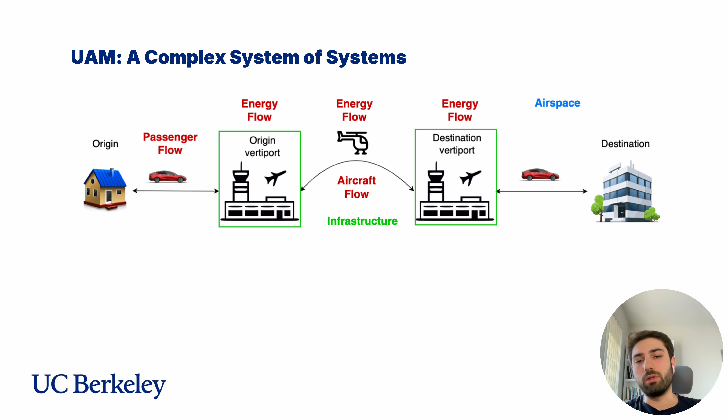Urban air mobility, aka UAM, is a complex system of systems. In this vision, passengers leave their origin and go to an origin vertiport using a vehicle or by walk. Then from origin vertiport to destination vertiport, they fly via eVTOLs. And then from destination vertiport, they use a vehicle or by walk to go to their destination.

However, in this system, we have sub-complex systems such as vertiports or aircraft fleet. Additionally, we have temporal couplings between these systems. For example, flight times in the system can be from 15 to 20 minutes. Passenger processing times or passenger waiting times can be 5 to 15 minutes, and charging times can be 10 to 15 minutes. So the bottleneck in the system can be any of these three, and this bottleneck will cascade to the other operations.

Additionally, we have resource coupling. For example, if you don't have enough infrastructure capacity, then either your aircraft will delay at the origin vertiport or they will hold in the air at the destination vertiport and they will burn energy. And this energy consumption will cascade into your operations.

For example, if you burn a lot of energy, then you need to charge more. If you charge more, then your aircraft will be unavailable for the incoming demand. So because of that, you will either lose some passengers, have to spill or reject some passengers, or your passenger waiting times will increase.

Additionally, weather will have significant impacts on these vehicles. Weather, or especially wind, will increase or decrease your energy consumption or increase or decrease your flight times.

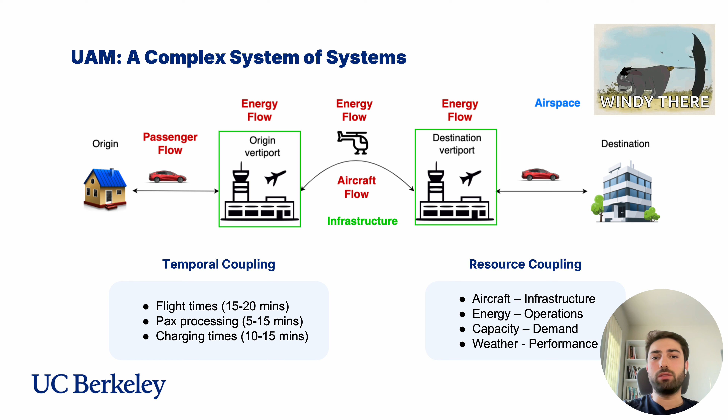Additionally, we can have uncertainty in the passenger arrival process. The demand uncertainty creates cascading effects throughout the UAM system. When demand spikes unexpectedly, we might face insufficient aircraft availability, and that will lead to longer passenger wait times or passenger spill.

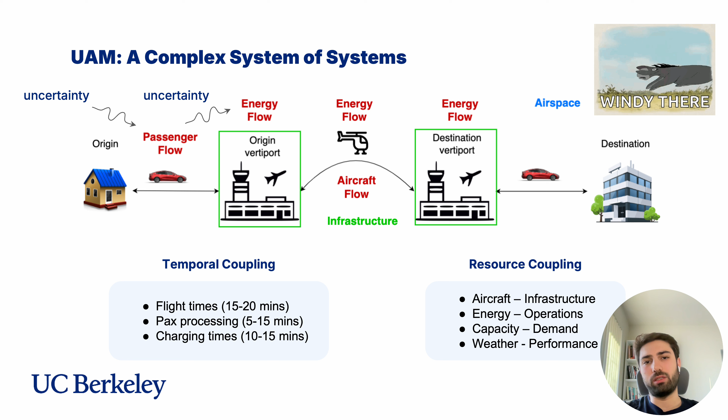We take a systems engineering approach to UAM. First of all, we will look into infrastructure. We will do vertiport design and analysis, and then move on to the modeling part. We'll introduce VertiSim, which is a UAM network simulation tool. Then we'll go into planning. We will optimize network operations while accounting for environmental impacts, particularly wind effects. Finally, we tackle the challenge of real-time fleet control through reinforcement learning approaches to fleet management.

All right, let's start with infrastructure.

All right, what is a vertiport? Vertiport is an infrastructure for eVTOLs to land, take off, taxi, charge, board, and deboard passengers. We can model vertiports using graphs. For example, TLOFs, which are touchdown and liftoff areas where aircraft take off and land, can be modeled using nodes. Parking pads can also be modeled as nodes. And taxiways can be modeled as links that connect these nodes together.

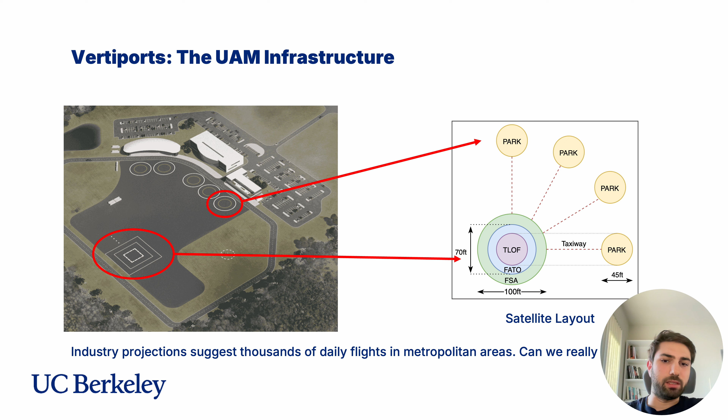All right, what is capacity and why does it matter? We define capacity as the maximum steady-state throughput of aircraft per hour, given that the maximum queuing delay for holding aircraft remains below a specified threshold with high probability. We define maximum queuing delay because we don't want aircraft to hold like 30 minutes, 45 minutes, an hour in the air because it burns a lot of energy. So we want aircraft to hold at most some specific threshold with high probability, and that's how we define the capacity.

The capacity will impact our network connectivity because if you don't have the capacity, you basically cannot fly that route. Secondly, low capacity will create some network effects that will impact your operations at other vertiports. Low capacity definitely will reduce your service quality and guarantee, and it will cost money in terms of land.

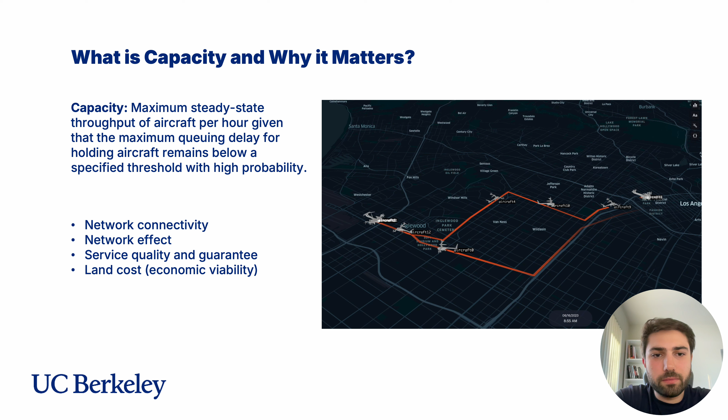Okay, vertiports are actually highly interactive stochastic systems. There is some literature on vertiports and, of course, airports. We draw some similarities from airport literature. For example, airports are modeled with stochastic queuing models.

They use single server queuing models with infinite buffer capacity. What I mean by infinite buffer capacity is that they model runways without any capacity at the sink level. For example, they assume there are infinite levels of parking pads or gates because airports are actually huge, so you can actually put aircraft somewhere at least.

There are other studies on vertiports. For example, some studies develop deterministic integer programs, and they're mainly upper bounds because there is no uncertainty in the system. And some studies did queuing models using single nodes or multi-nodes with independent queues. So in the later part of this presentation, we'll show why we should not model them as single nodes or multi-node with independent queues.

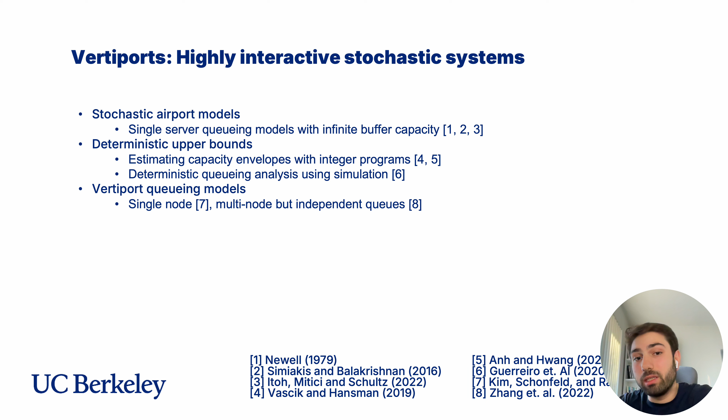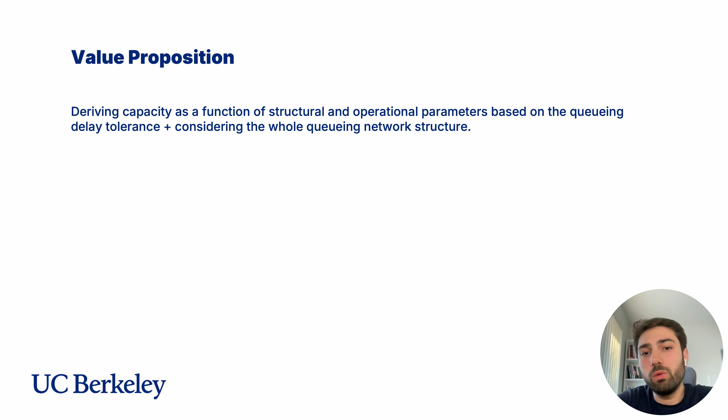Okay, the value proposition of this chapter is that we derive capacity as a function of structural and operational parameters based on queuing delay tolerance, and we're considering the whole queuing network structure of a vertiport. So let's model a simple vertiport using a queuing theoretical approach.

We model TLOF using an M/M/1 queue. M here represents Markovian arrivals. The second M represents the Markovian service time, and 1 is the number of servers. So we have 1 TLOF, and we have Poisson arrivals, and we have exponential service rates at the server. That's why we have an M/M/1 queue.

At the TLOF, aircraft see mu TLOF service rate. So the reciprocal of it, 1 divided by mu TLOF, is the average service time that aircraft see. So in the service time, we can include landing time, when the aircraft lands, if there's any safety check, etc. We can include everything in this.

So in the system, we have Poisson arrivals, and once the aircraft arrive, it gets on the arrival queue. If the TLOF is occupied or the parking pads are full, aircraft has to hold. Right? If it's the aircraft's turn, the aircraft will use the TLOF and then go to parking pads. At the parking pads, it will see mu charge rate of turnaround time, and we have C number of parking pads.

Once aircraft finishes its turnaround, it will get on the departure queue, go to TLOF, and from there aircraft will leave the system. Right, and in this case, the arrival rate has to be equal to departure rate in order to have a steady state system.

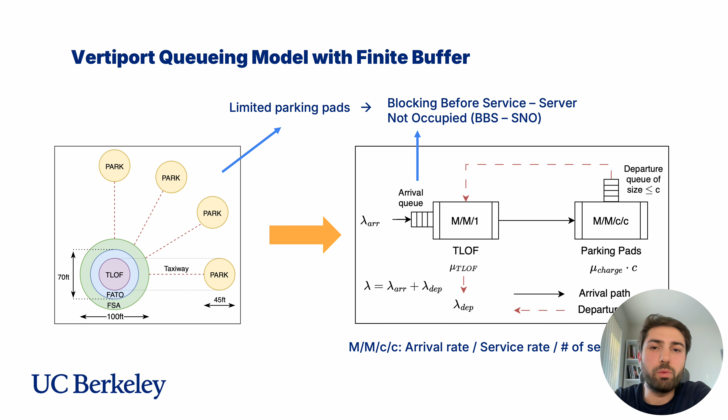In the system, we model blocking behavior. What we mean by blocking behavior is that once an aircraft comes at the arrival queue, they have to hold, or they have to wait for the aircraft that are departing, or if the parking pads are full, they cannot use TLOF. And we model this using the blocking before service, server not occupied blocking mechanism. And this mechanism is not well defined except for very limited and special types of queuing networks without a feedback loop. So we cannot solve this problem analytically in its current form.

Alright, to simplify the analysis and eliminate the feedback mechanism, we reconfigure the system into a tandem network. In the simplified model, we adjust the service rates of the M/M/1 queues by halving them to mirror the service dynamics of the feedback system. And that is necessary due to doubling of TLOFs in the reconfigured model. What we do here is we literally break the feedback loop and create two different TLOFs.

So here, aircraft first comes to the arrival queue, goes to a TLOF, then completes its parking turnaround processes, and then goes to another TLOF. So that's why we have the service rates of the TLOFs and the arrival rates that are coming to these TLOFs.

And then we realize that we can further simplify this model because in this first system, we have 3 state variables. In the second system, we lumped these two queues and then used a mathematical trick to calculate the service rate. The service rate mu c(NA, lambda) represents the cumulative effect of parking pad servicing and TLOF service for departure. And this is a state-dependent service rate because NA is the number of aircraft at the parking pads.

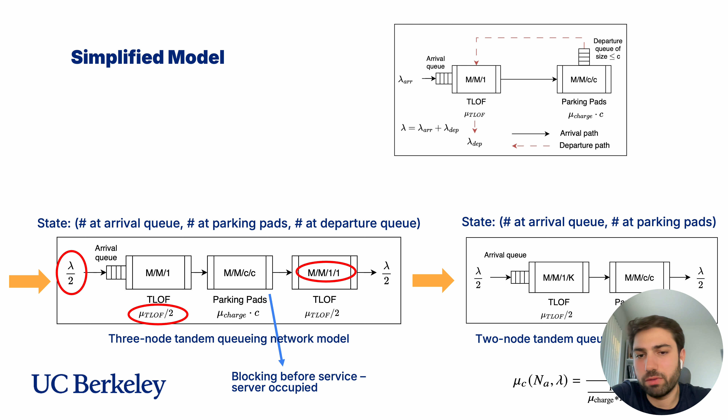Okay, in this system we have 2 states. We have the number of aircraft at the arrival queue and the number of aircraft at the parking pads. We draw the state transition rate diagram, like you see here, and then we solve the global balance equations. So we can solve the linear system of equations using pi times Q equal to 0. Here pi is the steady-state probability distribution of state transitions. So it will tell you the probability of transitioning from one state to another.

And Q is the transition rate matrix, which you see here. The arrow shows you each component of the transition rates. In a steady state system, inflows have to be equal to outflows. That's why pi times Q is equal to 0. And additionally, we have a normalization term because pi is a probability distribution and the sum has to be equal to 1. The global balance equations are written here. We just simply used the state transition rate diagram and created the equations.

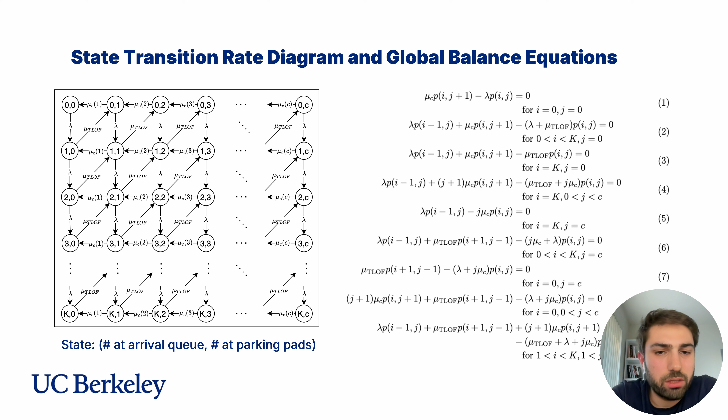And using these global balance equations, we could calculate several performance metrics like LQ, which is the average queue length in the airspace. We calculate variance of the queue length. And then by using Little's law, we calculate WQ, which is average queue waiting time in the airspace or holding time. And we also calculate the variance in the queue waiting time.

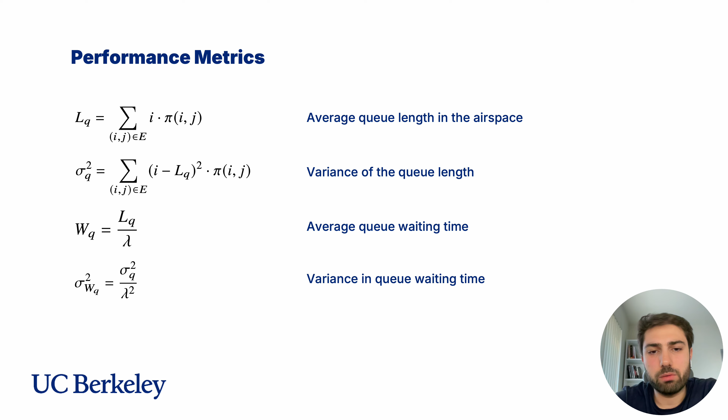Okay, one reason we are solving this in this manner is because we cannot isolate these two queues, takeoff queue and parking pad queue or surface queue. Because due to the blocking of the second queue, the parking queue, the arrivals to the second queue are state dependent. So in that case, we actually violate the Jackson network assumption. So we cannot isolate and solve these two queues separately, which is actually very easy to solve.

Here in these plots, arrival rate is on the x-axis. We keep increasing that, and then we show the blocking probability at the second queue. So as we increase the arrival rates, the blocking probability increases significantly. And because of that, there's a high interaction between these two queues. So we have to account for that.

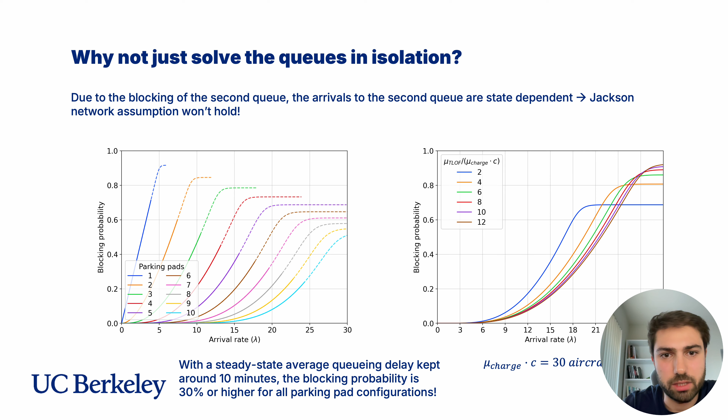All right, we also built a queuing network simulator to use it for further analysis. And then we compared results against a two-node queuing network, because we can compute a two-node queuing network mathematically, right? So we use mu takeoff divided by 2, 30 aircraft an hour, because we have half the rate now. And we kept mu charge fixed, which is 6 aircraft an hour. And when we compare this with a queuing network simulation tool, we saw a maximum difference of 5.9 seconds in the queuing delays, which is 3%, which is very low. So this tells us that we can use that simulator to study different models.

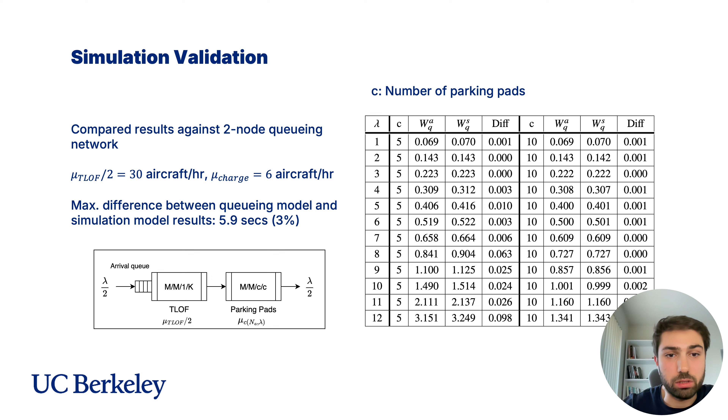Okay, some results. First of all, the fundamental question we are trying to answer is this: what is the maximum arrival or departure rate, or throughput, we can handle while ensuring that aircraft don't experience excessive waiting times? More specifically, we want to guarantee that aircraft waiting times stay below 5 minutes with 95% confidence. The challenge is that we can't directly calculate the exact distribution of waiting times in our complex queuing network. However, based on previous research and the central limit theorem, we can reasonably approximate the waiting times as following a normal distribution. This gives us a powerful statistical tool to work with.

So what we do here, we calculate WQ, the waiting time, plus the z-score times the standard deviation of that waiting time, so that we can get the upper bound of the queuing delay. So we use 1.96, which is equal to 95% confidence in the system, and we'll do the rest of the analysis based on these numbers.

In the results, we find that the maximum capacity of a vertiport can be at most half the takeoff rate, or roughly 20% of the surface capacity, which is the turnaround rate times the number of chargers. We need to note that we use Markovian processes in the system, so we use Poisson arrivals and exponential service times. And we also set our confidence level to 95% that we will never exceed 5 minutes of holding delays.

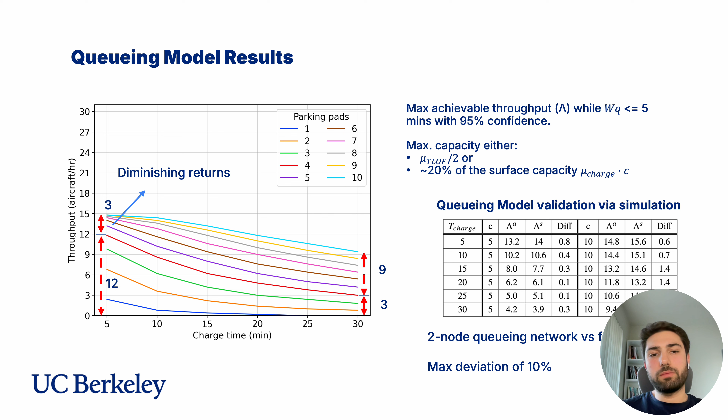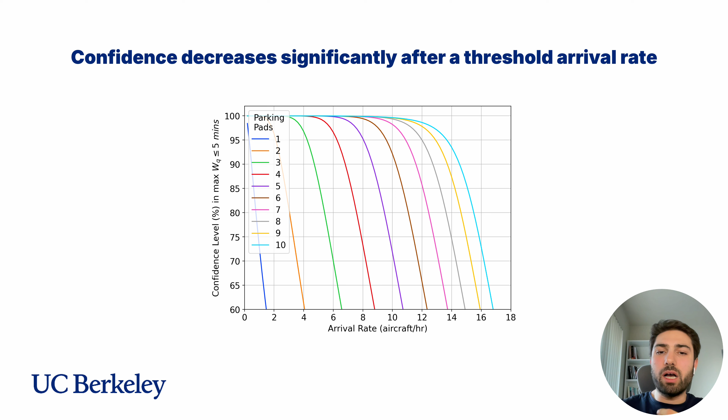We also want to show you the confidence level in the 5 minutes maximum queuing delay as the arrival rates increase. So let's pick an example parking pad number. Let's pick 10. At around 10 arrivals per hour, we are almost 100% sure that the queuing delay won't be more than 5 minutes. But beyond this threshold, further increases in the arrival rate do not substantially enhance the system throughput, but rather they diminish the system's controllability, because it goes beyond this point and it will become very hard to control the system.

Okay, so exponential distribution has nice mathematical properties like the memoryless property that allows us to do queuing math. However, it comes with a high variation cost. What I mean by that is that the standard deviation of an exponential distribution is equal to its mean value. We model takeoff service times and charging times with exponential distribution.

However, in reality, if you look at airports, you don't see that much variance in runway service times. Or if you go to a Tesla supercharger, most of the people charge their car for 15 to 20 minutes. So you don't see 2 to 3 minutes or 50 minutes charging very often. And I argue that the charging time distribution will be Gaussian with low standard deviation at these superchargers.

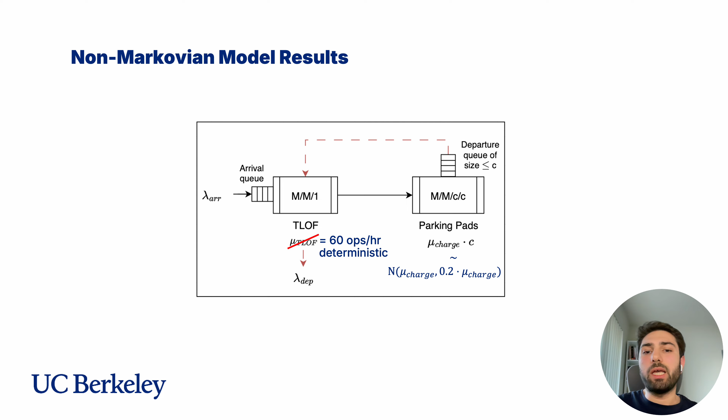So what we did is we said we'll have 60 operations an hour deterministically at each vertiport. That will be the service rate. And then we change the charge times into a normal distribution. We use mu charge as the average charge time, and the standard deviation is just 20% of the charge time.

Okay, we see the big impact of the high variance. The exponentially distributed TLOF service times case could actually get at most 15 aircraft throughput per hour, but with the deterministic case, we could get up to 30, the full TLOF utilization.

However, even in that case, we had to have at least twice the throughput capacity on the ground. So if you have around 60 aircraft an hour service rate on the ground, then you could actually reach that throughput capacity or full TLOF capacity.

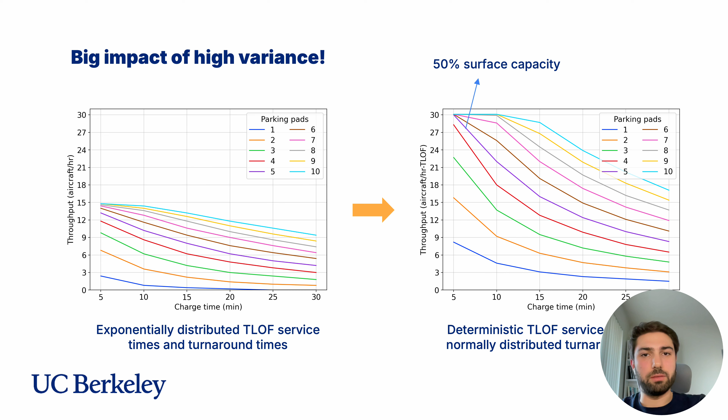We also did unit throughput analysis because we could compute throughput of different configurations, and we can also calculate vertiport footprint areas using FAA standards. We see that beyond 8 parking pads, config 1 starts to decrease, and until 8 parking pads it is the best configuration to use. And if you have larger areas and need more parking pads, then it's better to go with config 3, which is called pier layout.

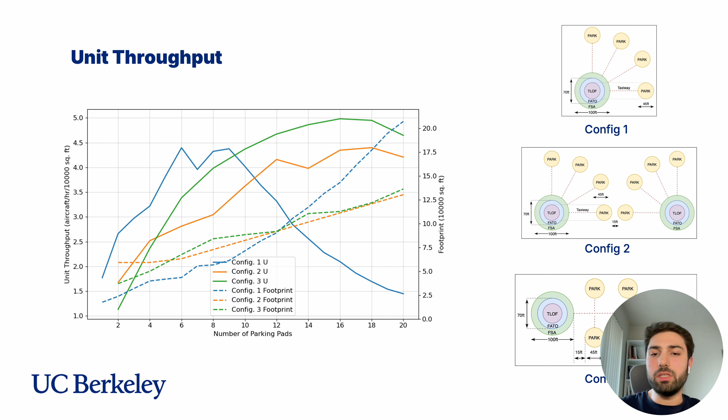Okay, in the next section, we'll present VertiSim, the Urban Air Mobility Network Simulator. All right, remember this slide? This is exactly why we built our own simulation tool, because none of the off-the-shelf simulation tools could provide us the fidelity and the customizability we need to model UAM operations.

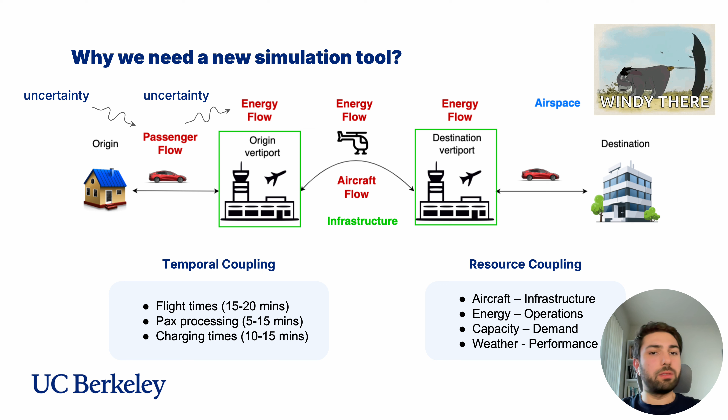I won't be able to play the video for this slide because I'm in recording mode, but I will explain VertiSim in words. VertiSim is a discrete event, single-threaded, asynchronous sandbox for UAM scenario experimentation and fleet management policy optimization. It computes several metrics like resource utilization, vertiport throughput, energy consumption, revenue flights, repositioning flights, flight occupancy, and passenger waiting time statistics.

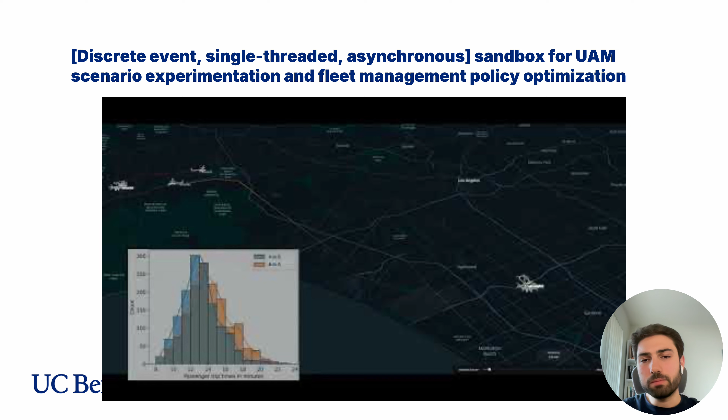The software architecture of VertiSim is very simple and extendable. First, you need to provide some vertiport layouts as an input. In the vertiport layouts, you need to provide the number of TLOFs, number of parking pads, and their locations, and also the taxiways that connect these nodes.

Then you need to provide some airspace specs. In the airspace specs, you need to provide waypoint locations in the airspace. These are 3D locations, or you can just use the default airspace creation tool of VertiSim, which just creates straight lines between vertiports. You also need to provide aircraft specs, which are aircraft dynamics, seat capacity, the weight, etc.

You also need to provide vertiport and network specs. You need to provide the vertiport locations, the number of chargers at the vertiports, the chargers' maximum charge rates and their efficiencies, and the connectivity of the network. You can also provide wind and weather data, which VertiSim will use to compute energy consumption of the aircraft. You can also provide aircraft and passenger arrival schedules.

For a network simulation, you don't have to provide aircraft schedule. You can interact with VertiSim in 3 different modes. One, you can use on-demand scheduling. VertiSim can use its heuristics for dispatch and charging to calculate flight schedules and charging schedules.

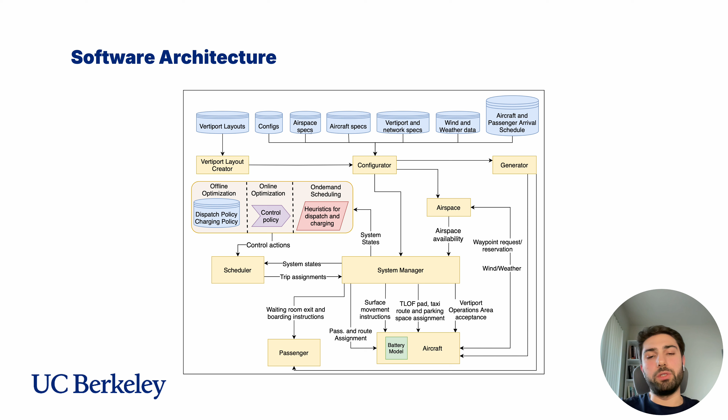Second, you can use VertiSim to train your reinforcement learning algorithms and create control policies. Or you can build your own offline optimization tool and create a dispatch and charging policy and put it into VertiSim, and it will simulate for you and then produce more metrics.

All right, lastly, I want to talk about the vertiport operations. As you see on the first part, aircraft arrive at an arrival queue, and there they have to hold until they reserve a parking pad and TLOF. Once they get the parking pad and TLOF, they move to final approach fix, then they go land at the TLOF, and then taxi in and do the turnaround process, then taxi out, and then final takeoff and go to departure fix.

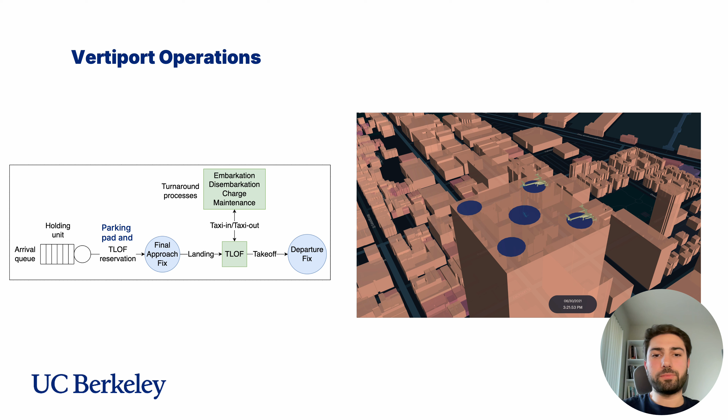Okay, the next section we'll talk about a simulation optimization framework for developing wind resilient UAM fleet management. When we talk about UAM, we are envisioning a future where urban skies are bustling with eVTOL aircraft in a clean and sunny day with no wind. This is the ideal scenario. However, the reality is different.

We live in a world where wind disrupts our plans, and it can cause flight disruptions, safety issues like separation, turbulence, and passenger discomfort. And that can also increase energy consumption, which then will lead to more capital investments in terms of land and aircraft. So in this work, we look at the wind impact from one aspect, which is the fleet management and sizing.

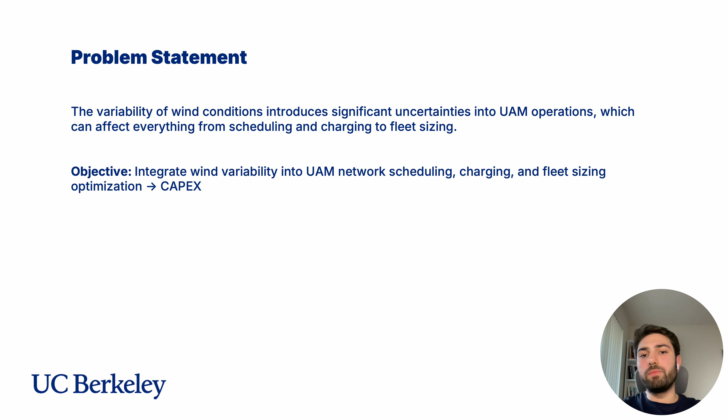Okay, our hypothesis is this. The variability of wind conditions introduces significant uncertainties into UAM operations, which can affect everything from scheduling and charging to fleet sizing. And our goal is to integrate this wind variability into UAM operations and improve our CAPEX calculation.

Okay, there have been several studies that studied wind and its impact on operations. First of all, Schweiger and their team studied the impact of wind-induced separation thresholds on UAM network downtime and passenger delays. They realized that there are some seasonal and some timely performance decreases of vertiports.

And Pradeep et al. studied head, cross, and tailwind impact, and they realized that there's a 52% increase in energy consumption from crosswind to headwind when you have 45-mile-per-hour wind on average. And finally, we also found a study on legacy aviation fuel consumption. Wind can increase fuel consumption of a legacy aircraft by 14% compared to a no wind scenario.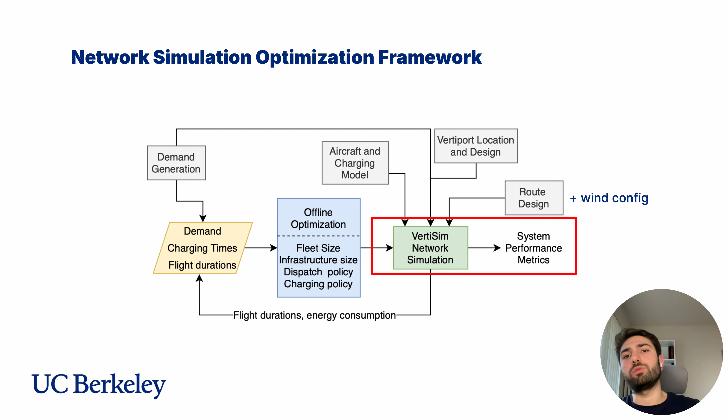In our framework, for every hour of the day, the energy consumption and flight duration from vertiport A to vertiport B might be different due to wind. So the optimizer takes time-varying charging times and time-varying flight durations and demand as input and produces fleet size, infrastructure size, dispatch policy, and charging policy for the given configuration. We then simulate the optimizer output in VertiSim to get more granular performance metrics.

Okay. We explored the impact of wind on operation metrics across a two-vertiport network. The choice of this network is driven by its simplicity, which allows for a focused analysis free from the complexities of larger networks. The area of study spans 150 miles from Monterey to Sacramento, which employs hypothetical vertiport distances ranging from 20 to 150 miles in 10-mile increments. The heading angle from vertiport A to vertiport B is calculated to be 13 degrees relative to north.

Okay. We use the rapid refresh data, hourly weather forecast data, with an 8-mile spatial resolution. And utilizing this data set, we extracted 5 years of historical wind data from 2015 to 2019 at 1,500 feet above ground level. We chose the closest grid points along the vertiport routes to capture the relevant wind data.

The wind data shows an average speed of 25.5 miles per hour with a predominant direction of 226 degrees relative to the north. The standard deviation is 15.5 miles per hour and 98 degrees, respectively. And that actually reflects significant fluctuations over time.

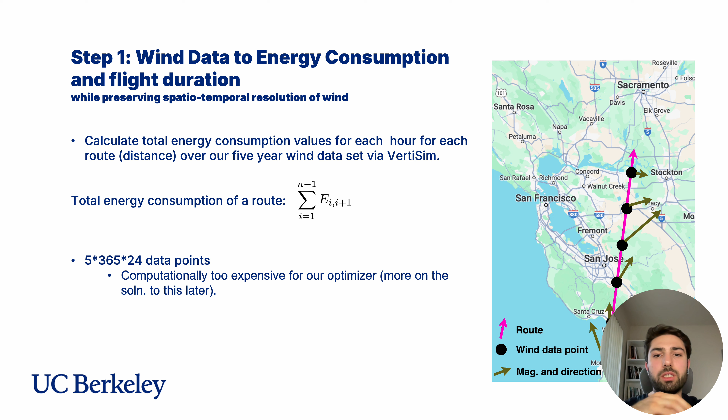Okay, another thing is we have very large variation in terms of energy consumption and flight durations. And we wanted to account for that. Variability is important to us because temporal and spatial instability is both realistic and more difficult to optimize against. And the current literature uses fixed median values for wind speed and direction, and that neglects the variability of wind speed and direction over time and space.

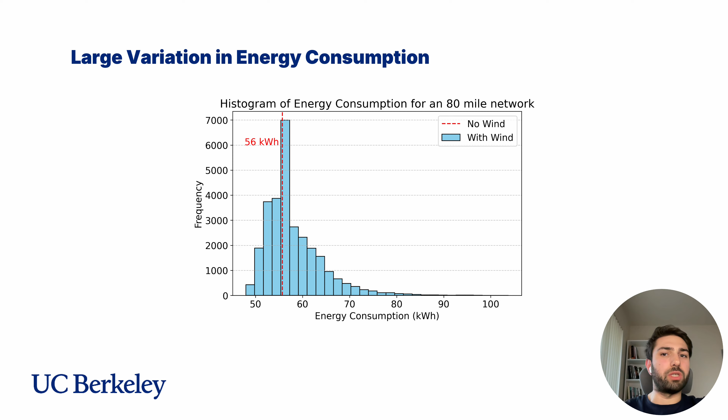All right, since we could not use this 5 years of wind data into the optimizer, we process the wind data for optimizer input using VertiSim. We used k-means clustering to capture the wind variation along each route within 8 clusters for each hour. And with some probability, every single hour's energy consumption goes into one of these clusters. So we fed 5 years of hourly wind speed and wind direction data into our simulator and calculated the energy consumption and flight duration for every hour for each flight direction.

As aircraft move between different wind zones, our simulations adjust to changes in wind speed and direction to preserve wind's spatial and temporal variability in our calculations. So once we obtained this data set, we aimed for an explained variation of at least 70% and identified 8 optimal clusters for each flight direction. So each cluster centroid represents a set of 24-hour energy consumption and flight duration data that reflects varying wind conditions throughout the day.

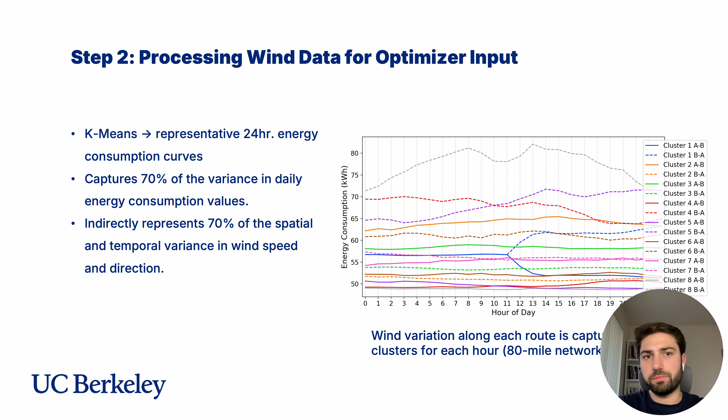Okay, I'm not going to spend too much time on the optimization model. You can read it in the paper. But what we are trying to do is mainly minimize the fleet size. Our aircraft can be in idling, charging, and flying state. So we are trying to minimize the sum of number of idling aircraft, number of charging aircraft, and number of flying aircraft.

The main dynamics at the vertiport occur like this. So N_ikt is the number of idle aircraft at time t. We calculate this number by using the following dynamic equation. We sum the previous idling aircraft plus the arriving aircraft at time t prime minus the departing flights at time t plus the aircraft that are finished charging and become idle, and minus number of aircraft that begin charging at time t. And here we always use time varying flight times and time varying energy consumption between the flight routes.

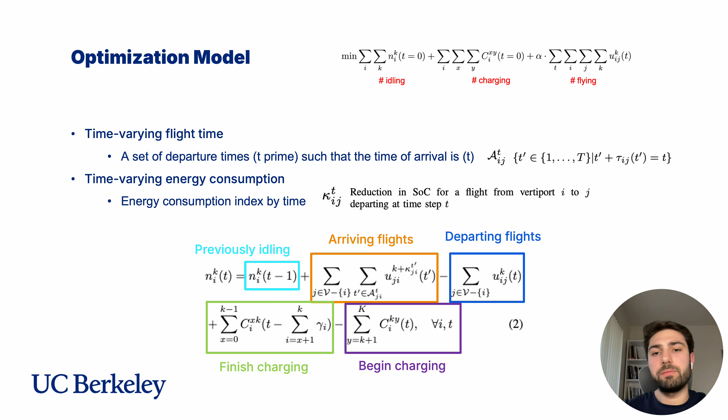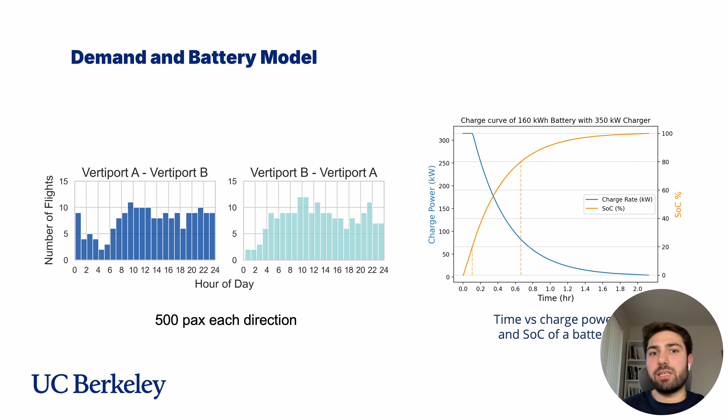Okay, we use a demand model and a battery model. The details are in the paper, but we use an asymmetric demand from vertiport A to vertiport B, and we use 500 passengers in each direction. So in total, we have 1,000 passengers a day, and we use a charging model that underscores the inherently nonlinear characteristics of the charging process, where charging speed decreases as the battery approaches full capacity.

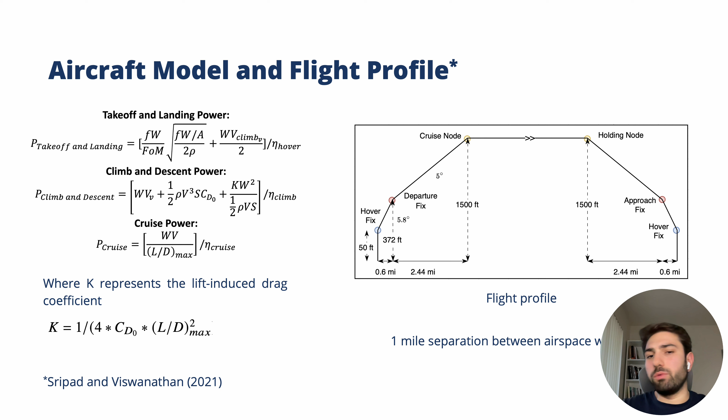Okay. In the next section, we have the aircraft model and the flight profile. You can read the details of the aircraft model. We took the main parts of the model from Sripad and Viswanathan, and we also use their flight profile. We have 1 mile of separation between airspace waypoints. Basically, VertiSim employs true airspeed for power calculations and ground speed to determine the flight time. So energy consumption is a combination of both, since it is the integral of power over time.

In the existence of wind, the horizontal true airspeed is adjusted to satisfy required time of arrival imposed by fixed vertical airspeed in all phases except cruise, which means that we keep the ground speed the same by adjusting the power output to counteract the effects of wind, so that the aircraft can be at the right latitude, longitude and altitude triple at the same time.

Whereas in cruise, the airspeed is fixed to minimum power, and just the heading is adjusted to ensure the aircraft flies towards its destination vertiport. Thus, the power consumption is the same. However, the aircraft will fly slower or faster with respect to the ground, depending on the angle of the crosswind. This means that the energy consumption will still change.

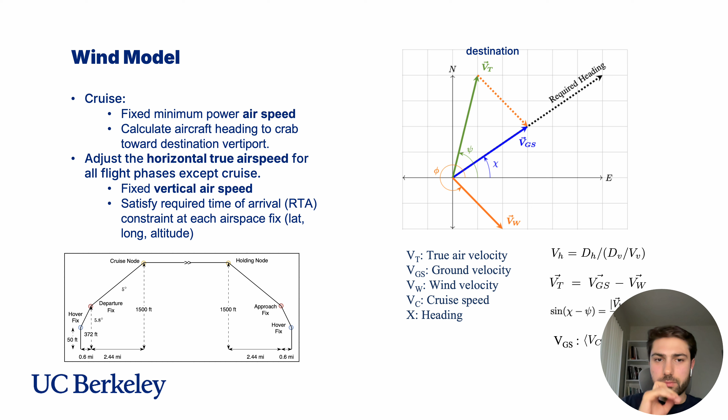We observe that energy consumption can increase by up to 43% on certain routes due to headwinds. This leads to more frequent and longer charging sessions, which in turn can result in aircraft and infrastructure unavailability. Consequently, this may cause schedule disruptions and longer passenger waiting times.

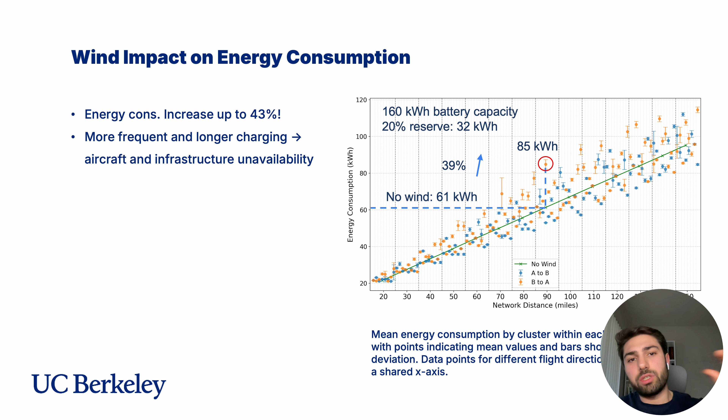Additionally, we observed that this aircraft can make a round trip of up to 80 miles with a single charge if it starts the mission with 100% SOC. We'll see the impacts of this on the next slide.

Next, we look at the average total charging times for each network. We observe that for shorter distances, the aircraft charges less, which is very intuitive because it doesn't have to burn a lot of energy.

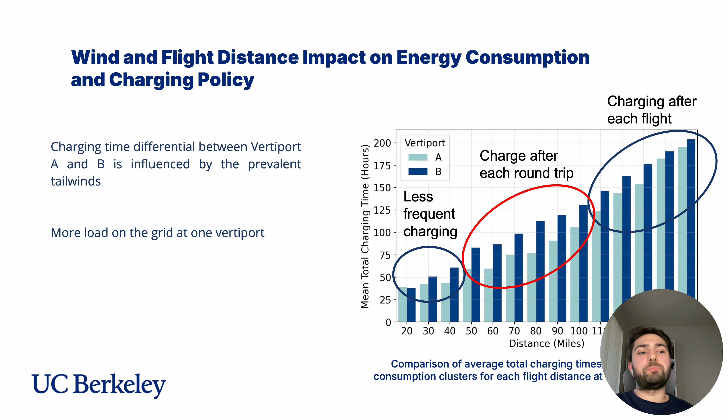For middle distance flights, from 50 miles to 100 miles, aircraft charge after each round trip. For longer distances, aircraft have to charge after each flight. For these middle segments, we observe that there's more load on the grid at one vertiport. So when considering your operations, you have to actually look at the load you're putting on the grid.

Lastly, I want to share the fleet sizes that we found for each energy cluster. On the x-axis we have energy clusters, on the y-axis we have distance, and here we see the fleet sizes required. So how you can use this information is the following.

You can calculate the expected fleet size to serve a specific demand pattern by accounting for the wind impact. What you can do is multiply the cluster frequency with the fleet size that we found, and if you sum this, you will get an expected fleet size.

We saw a significant impact of wind on fleet size, because for short flights we see fleet size variation of at most 2. For medium distances we see 3, and for long distances we see fleet size variation of 6. That actually results in about 33% difference in fleet size within energy consumption clusters.

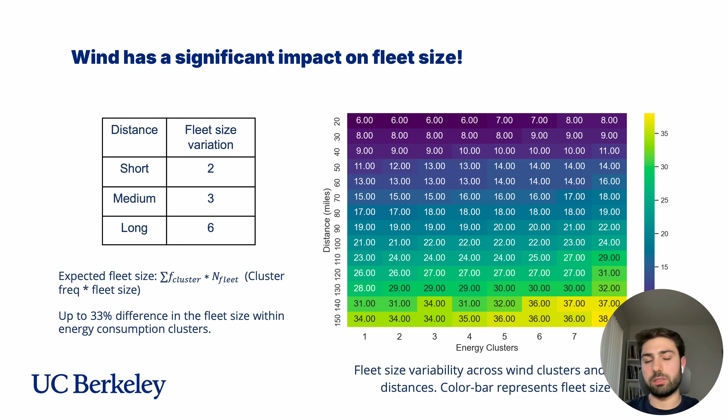Right, we're now on the final chapter. The final chapter is called Online Fleet Management Under Uncertainty, a deep reinforcement learning approach. So we're going to do control, and we're going to do real-time fleet management for the UAM use case.

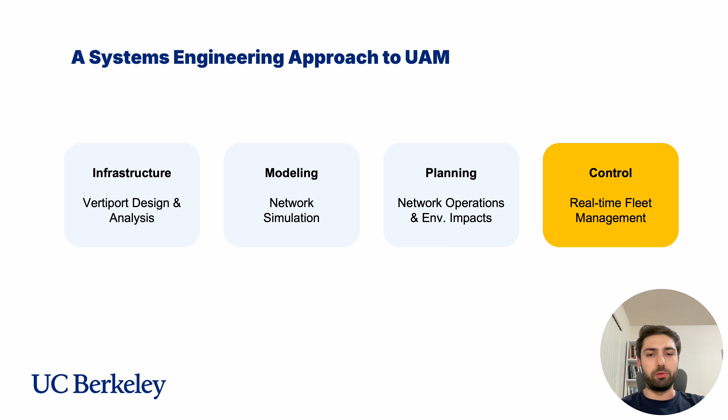UAM fleet management has three aspects. One is the dispatch: we need to determine when and which aircraft to serve the passengers. Then we need to determine the route, the destination vertiport of each aircraft selected to serve the passengers. We also want to select some aircraft to do repositioning flights where aircraft supply is not enough to cover the incoming demand. And finally, we need to determine the charging schedule of eVTOLs - which aircraft to charge, and for how long.

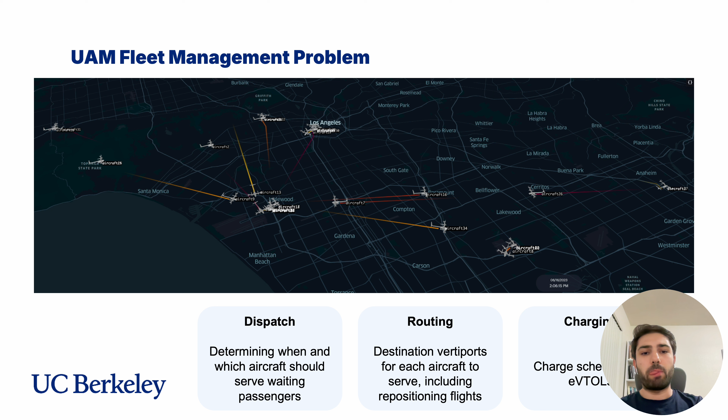There are a few challenges in UAM fleet management. The first is the infrastructure constraint: we have limited parking spots and limited chargers, and the aircraft need to share these limited resources. The second is demand uncertainty - the demand is spatially and temporally asymmetric in the system, and we have limited demand prediction as these systems will operate on demand.

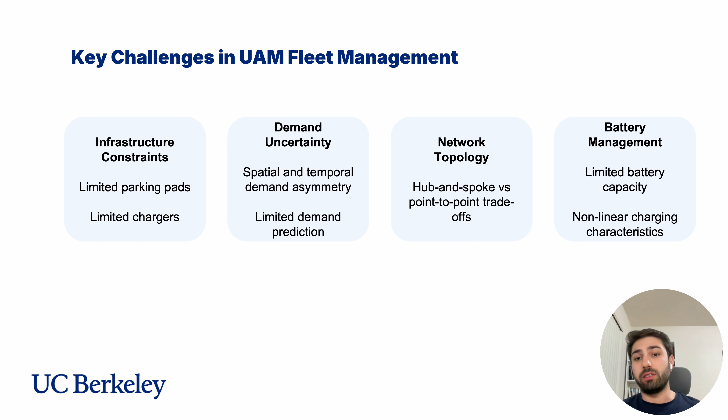Third, network topology. UAM operators will operate in different cities, and at each city they might be using different topology, like hub and spoke or point to point, and the operations strategy will be different for each market. Finally, battery management - these aircraft have limited battery capacity, and battery charging, as we showed before, has nonlinear characteristics. That's why we try to do real-time decision making, considering dispatch, routing, and charging at the same time.

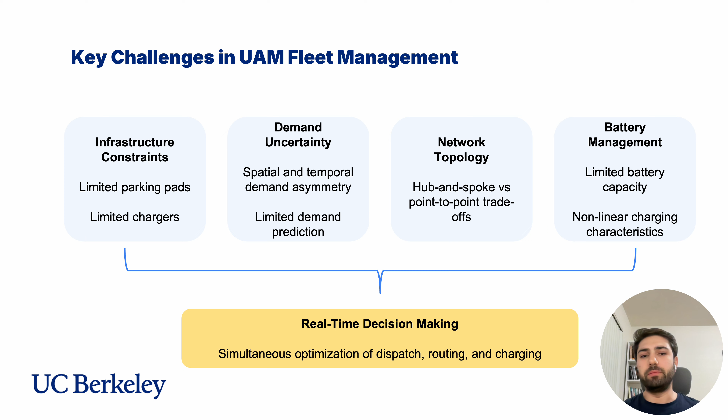In order to formulate this problem, we first need to define some components in the system. First, we define network components: vertiports with a number of parking spots, number of takeoff pads, and number of chargers. For aircraft, we consider passenger capacity, battery capacity, and associated reserve.

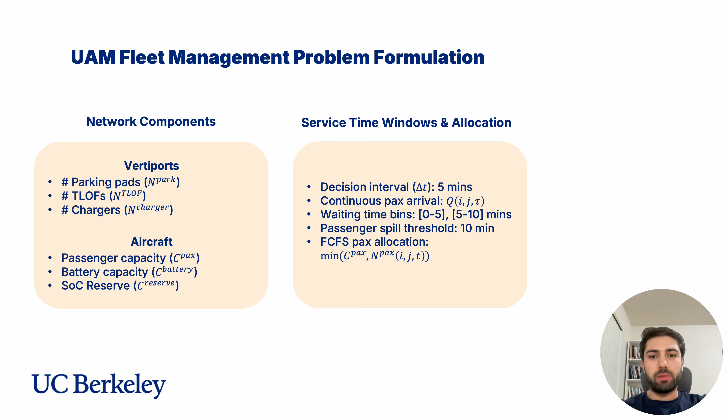We then introduce service time windows and the allocation rules. Our decision-making interval is 5 minutes, and within these 5 minutes we have continuous passenger arrivals. We observe waiting time bins: how many passengers have waited between 0 to 5 minutes and 5 to 10 minutes. After 10 minutes, we consider that these passengers are spilled, or they leave the system after 10 minutes of waiting time. Passenger allocation is done based on first come, first serve.

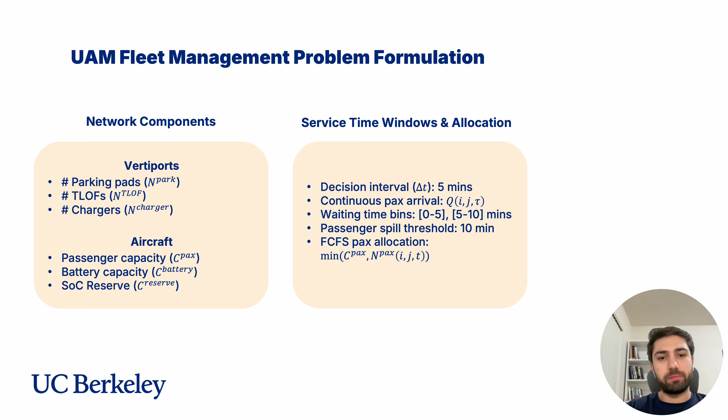We consider aircraft capacity and the number of existing passengers at that time for that origin destination pair. Our objective is to maximize passengers served and minimize operational costs. We use Markov decision process formulation to formulate the problem.

First, in our state space, we have vertiport states, aircraft states, and the system time. In vertiport states, we have waiting time bins. We observe how many passengers are at each waiting time for each OD pair IJ, and we also observe the number of spilled passengers for OD pair IJ at time step T.

For aircraft state, we have status, state of charge, and location of the aircraft. Status can be fly, charge, and idle. Here we have an environment that we described before, which is VertiSim. In VertiSim, we have much more detailed status of aircraft. In the flight phases, we have hover climb, climb transition, climb, cruise, descent, descent transition, hover descent. But from a reinforcement learning agent perspective, we only need to know that the aircraft is flying for decision making. That's why we simplified the state space in this case.

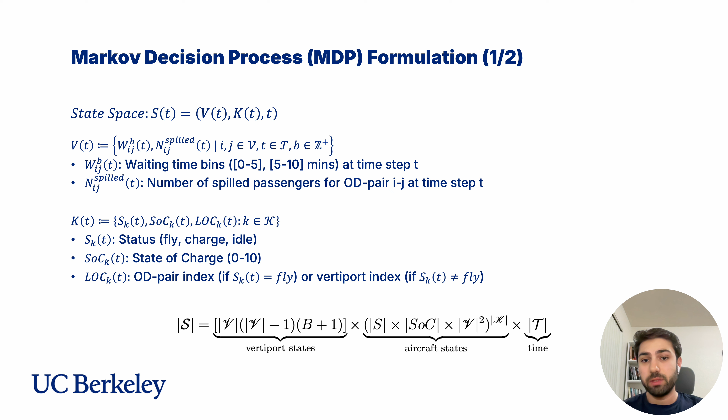State of charge can be from 0 to 10, and we discretize that. Location can identify two things: if the aircraft is flying, it describes the OD pair index; if the aircraft is on the ground, it is the vertiport index.

The action space consists of a set of actions for each aircraft. Aircraft can take several actions: fly from I to J, charge, or do nothing. The size of the action space depends on the number of vertiports we have. Each charge action takes 5 minutes. After 5 minutes, the aircraft becomes idle again, and the RL agent can take the charge action to charge it more.

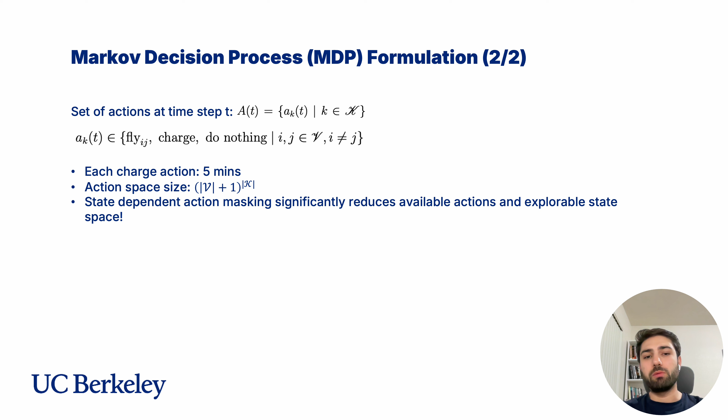We have a very large state space and action space for this problem, but we apply action masking to significantly minimize the available actions and explorable state space so that we could solve this problem. Our reward function consists of 3 parts: revenue minus expenses minus spill penalty. We use spill penalty in order to accelerate the learning.

The revenue is calculated as follows. We multiply the number of passengers flying from I to J times the fare of IJ. The fare IJ is determined by the distance times the seat per mile. The seat per mile parameter is $3 per mile for our case. We calculate the number of trips by looking at the aircraft capacity and the number of passengers that want to fly from I to J at time T.

Kappa IJ at time T shows us the flights at time T that are going to fly from I to J. So we could get the capacity for time T and then determine how many passengers will fly for that time step. We calculate the number of passengers by just looking at the waiting time bins.

The expenses have 2 parts. The first part incurs when we charge the aircraft. We calculate how much energy we added into the aircraft at each charging session. There's a state of charge percentage difference times the battery size and times the price, the kilowatt hour price for that city.

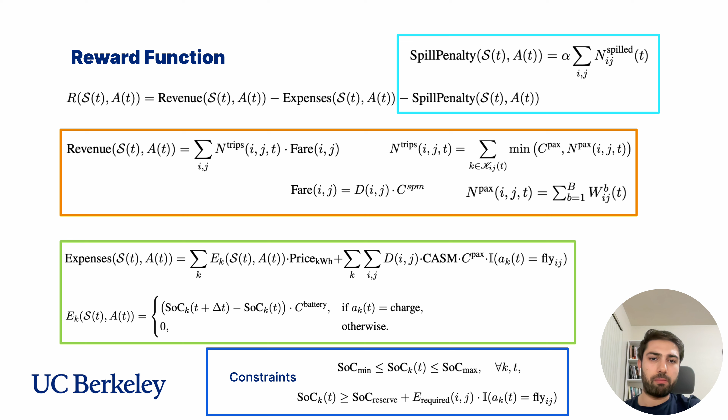We solved this problem using 4 different policies. We developed an integer program, we use RL, we use a greedy policy, and a random policy.

The integer program provides us a theoretical upper bound because it has complete information of demand and acts accordingly. It tries to minimize spill and number of flights, which means we're trying to maximize the number of passengers served and minimize the operational expenses.

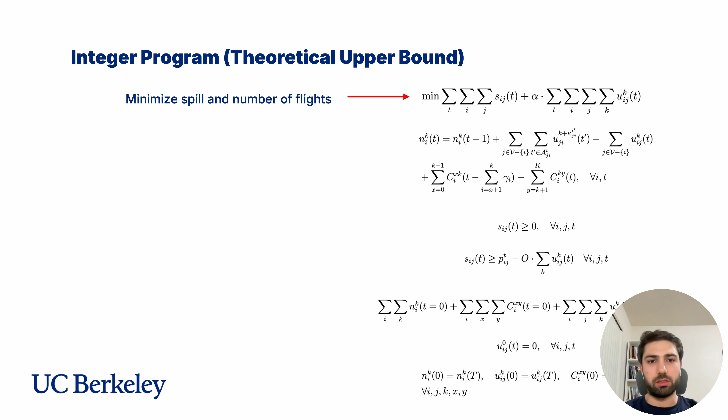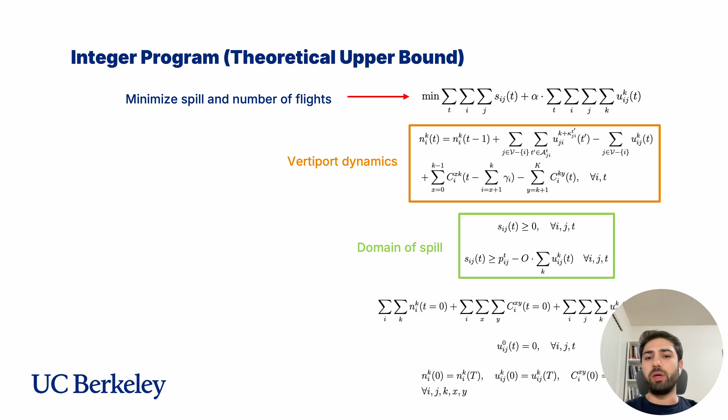We have a few constraints. You will be familiar with this one from the previous chapter: it defines vertiport dynamics. The next set of constraints defines the domain of spill. Spill has to be greater than or equal to 0, and spill is defined as the difference between passenger demand and the supply we provide. We also fix the fleet size in this problem, and we don't allow aircraft to fly when they have less than reserve SOC. Finally, the start state has to be equal to the end state so that we can repeat the same policy when we see a similar demand.

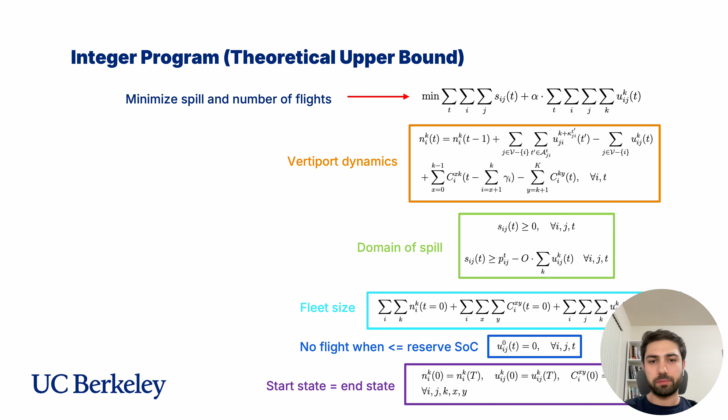Okay, the reinforcement learning algorithm consists of an RL agent and the interaction with an environment, which is our simulator VertiSim. The RL agent provides an action and gets state, reward, and action mask in return. Through thousands of interactions with the environment, it learns the model of the environment.

It learns the state transitions and then acts accordingly. I'm not going to lecture you on the well-known PPO, proximal policy optimization algorithm architecture, but what we added here is LSTM layers, which is also not new, in order to capture the temporal dependencies in our problem.

We also use action masking, which is determined by the aircraft's current status. If any aircraft is flying, you cannot assign a charge to that aircraft. The SOC also determines the action masking - if we don't have enough battery or charge to fly to certain destinations, we just mask out those destinations.

The greedy policy is basically a rule-based policy. We have policies for charging and dispatch. For charging, it's very simple: if the SOC of any aircraft is below 20%, we charge it to 60%.

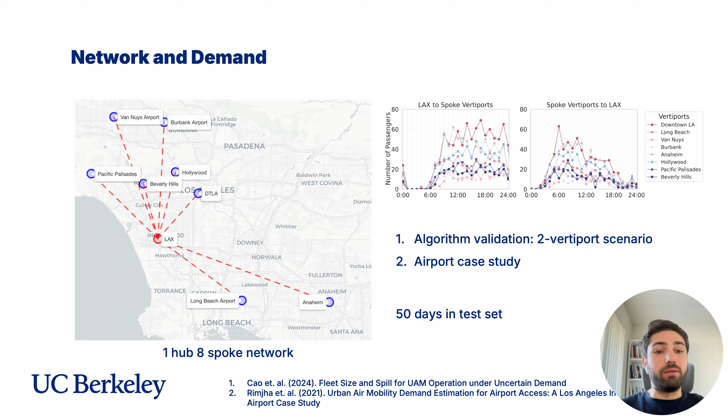The PPO-LSTM variant achieved better performance compared to pure PPO, and we think this demonstrates the value of incorporating temporal dependencies in the decision-making process. The PPO-LSTM converged to a policy that generated average cumulative rewards approximately 12.5% below the IP optimum, while pure PPO's performance stabilized at around 15% below optimal.

The optimality gap further increases roughly 2.5% on the test set for both algorithms. This relatively small gap is particularly noteworthy given that the RL agents operate without perfect information about future demand, unlike the integer program, which has complete future demand knowledge.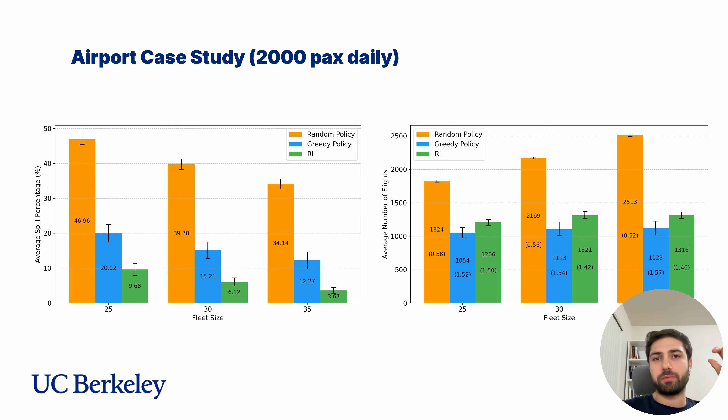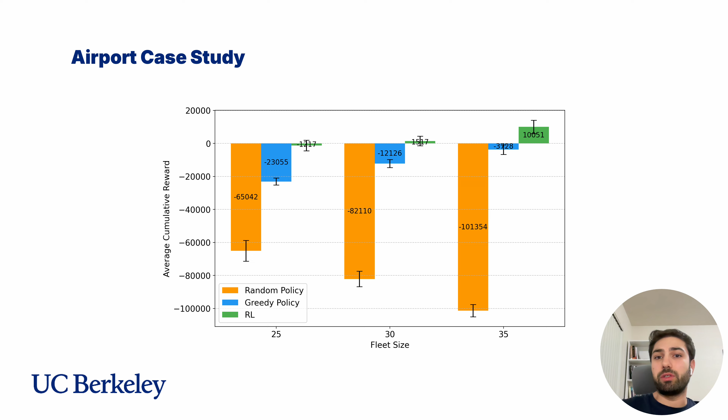We then evaluated system scalability by testing three demand levels using 2,000, 4,000, and 6,000 daily passengers. In this case, we fixed the fleet size to 35. These analyses revealed some fundamental differences in how each policy handles growing demand under resource constraints. The RL policy's economic performance improved significantly with increased demand, with rewards growing from 10,051 to roughly $74,000, despite higher spill rates, of course, because of higher demand. These improvements we think stem from two factors: higher passenger volumes generate more revenue, of course, and better capacity utilization, as shown by these increased occupancy rates shown in these parentheses.

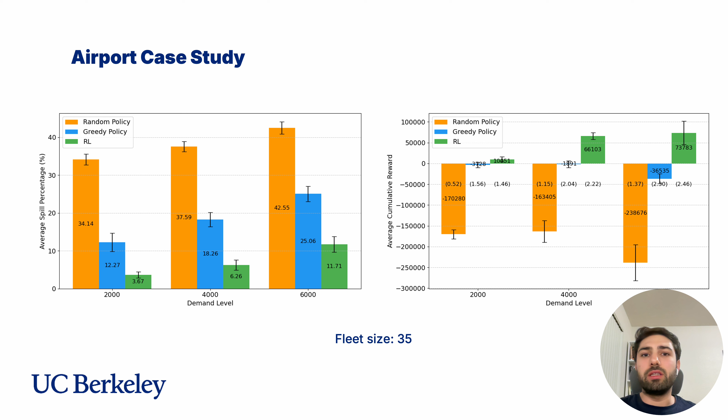In contrast, the greedy policy's performance deteriorates under higher demand. While it achieves reasonable spill rates at 2,000 passengers, like 12%, its performance degrades sharply at 6,000 passengers a day, where it goes to 25% spill. This exposes a key weakness. Reactive decision making for this type of on-demand system becomes increasingly inadequate as demand grows, even though occupancy rates improve.

All right, now we're at the conclusion and future research directions.

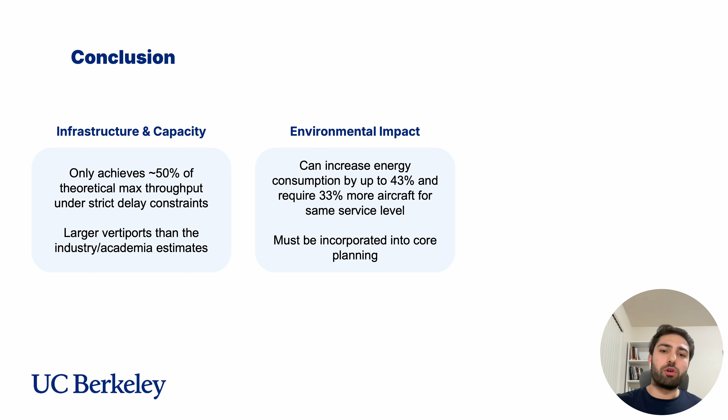Next, we looked into environmental impacts, specifically wind impact. And wind can increase energy consumption by up to 43%, and it might require us to use 33% more aircraft for the same service level compared to no wind scenarios. So we have to be incorporating wind into our planning algorithms.

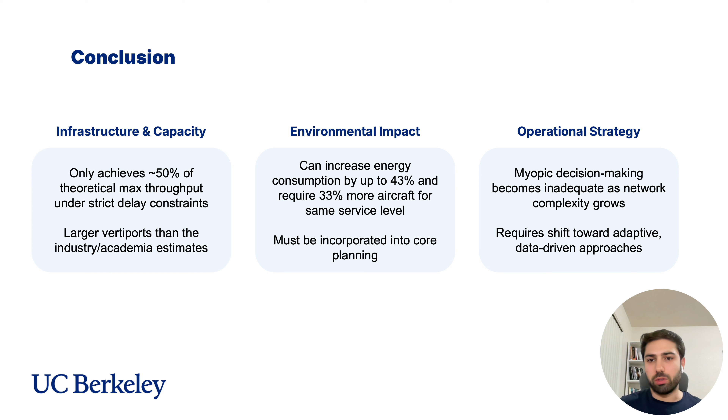All right, in this last slide, I would like to talk about the future development of VertiSim and research directions. VertiSim has been my baby throughout my PhD, and soon we will open source this tool to serve the community, and we will ask from community to further develop it. VertiSim provides a comprehensive foundation for UAM network simulation, but several key areas present significant opportunities for technical improvement and expanded capabilities. Three critical directions for future development emerge from our research experience.

The first one is the heterogeneous fleet support. The current implementation of VertiSim supports only homogeneous fleet operations, and that limits our ability to study complex interaction that would arise in real-world UAM operations with multiple operators.

The second one is the advanced battery modeling. The current battery model in VertiSim employs a simplified approach based on electric vehicle charging characteristics. And if your use case allows it or makes it meaningful, you can use physics-based models that account for battery degradation over time with multiple charge cycles. Or you can introduce temperature effects on charging efficiency and battery performance. You can also do detailed charging dynamics, including variable charging rates and thermal management requirements.